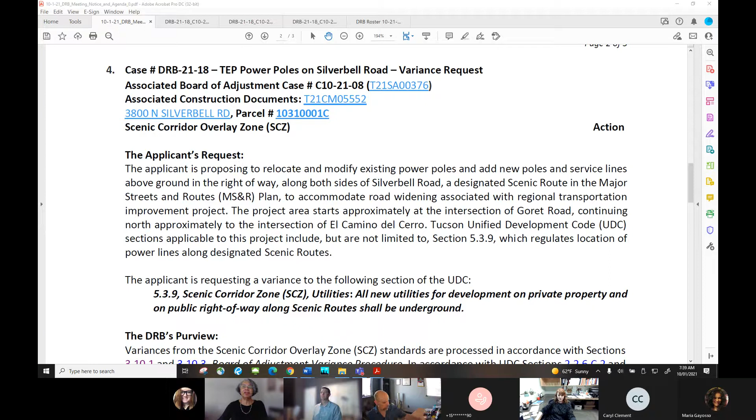The applicant is requesting a variance to UDC section 5.3.9, which regulates the location of utilities on designated scenic routes. Specifically, they're asking to allow relocation and modifications of power poles above ground on a scenic route, and the second request is to allow new power poles and service lines to be installed above ground on a scenic route. That is a general summary of the case.

The code section, UDC section 5.3.9.a, says all new utilities for development on private property and on public right-of-way along scenic routes shall be undergrounded. Specifically with the Board of Adjustment, variances can be requested when there are unique physical circumstances that prevent conformance with code requirements. That's my general presentation for this morning. I'm willing to answer any questions you might have.

Okay, thank you for that overview. So just to set the expectation for the board, is our purview to evaluate whether we would recommend a variance and then the variance board decides for sure? Or what is our exact purview?

We're just going to give our recommendation, either up or down, for this request of a variance, and then it's going to be forwarded to the Board of Adjustments for the final decision. And Russlyn, correct me if I'm wrong, I believe that the DRB can also make recommendations that would assist in mitigating any negative impacts that might occur. Yes, we can make recommendations to that effect.

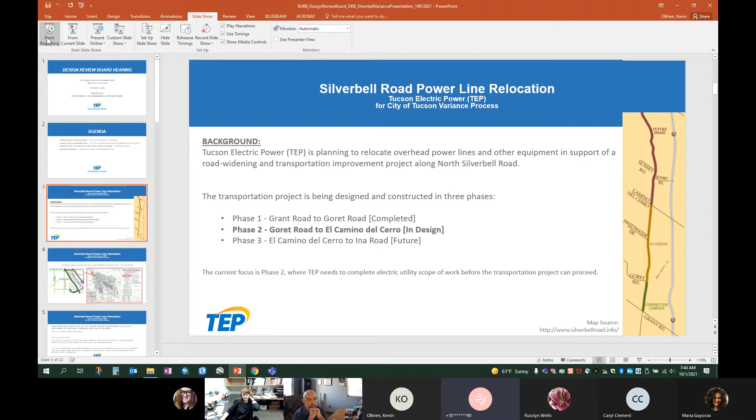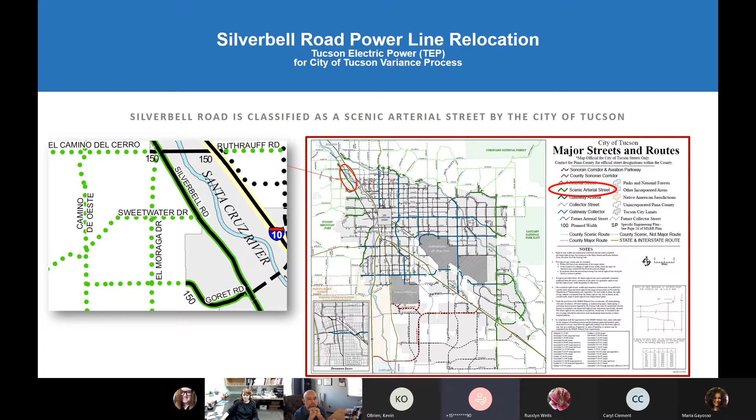Silverbell Road is classified as a scenic arterial street. I'll go ahead and run this that way—this will be better. As you can see here, from Goret Road to El Camino del Cerro, Silverbell Road is classified as a scenic arterial street per the City of Tucson Major Streets and Routes Plan. As such, it's subject to sections of the UDC.

Again, as Russlyn mentioned, section 5.3 pertains to the scenic corridor zone, and 5.3.9 pertains to utilities, where subsection A, I'll paraphrase, states that new utilities be undergrounded, and subsection B specifies that while upgrades and reinforcements are allowed, the total number of electrical circuits cannot be increased. So these are the two items that we're seeking a variance for, which I'll present more information on as follows.

As you'll see, the blue line represents the relocation section. So just north of Sweetwater Drive, the existing power line is planned to transition from the west side of Silverbell to the east side, and the new line will be constructed along the east side of Silverbell, where the existing line, represented by the green line, will be removed. Continuing south, again, the blue line represents the relocated section that will be a new power line, and then the green line along the west side of Silverbell will be removed.

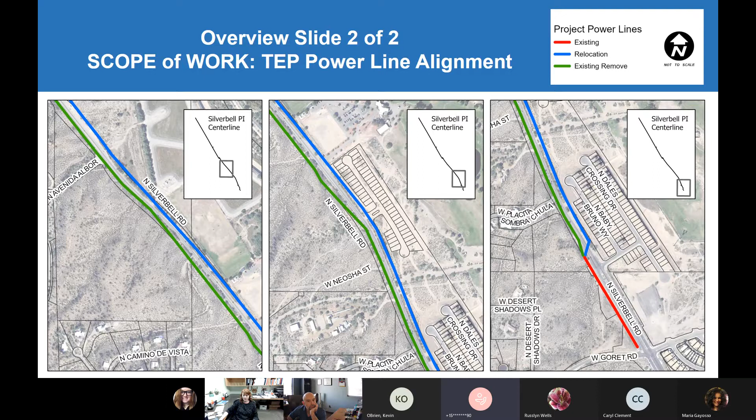Now, to help illustrate this, we've prepared several visual simulations. The image on the left provides a photograph of current conditions, while the image on the right shows a rendering of designed future conditions. These can be thought of as a before and after picture, left and right. The design simulation also includes the footprint of the transportation project, including roadway lanes and the new pedestrian bike path.

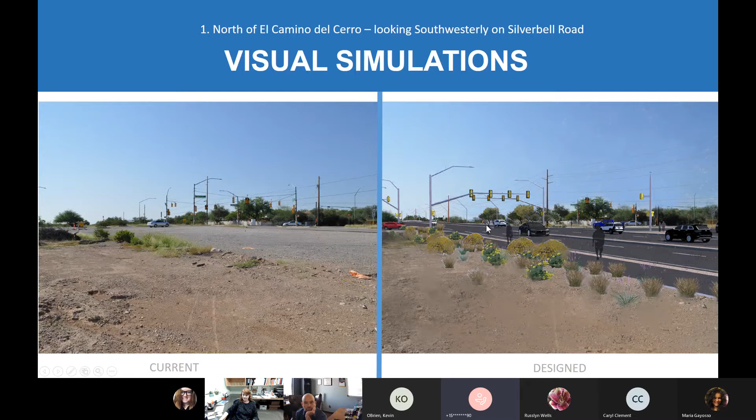This first simulation is located just north of El Camino del Cerro, looking southwesterly on Silverbell. This black car here in the foreground is heading north on Silverbell, while these cars on the right, a black car and a white car, are heading south. You'll see the existing utility along the west side of Silverbell, and in the design future condition it's similar, where this power line continues to stay on the west side, continuing south along Silverbell to a point just north of Sweetwater.

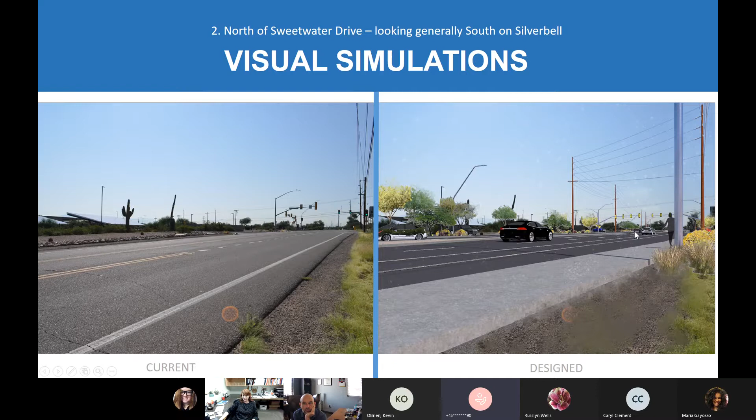This simulation shows the existing conditions where the power line is located on the west side, and the designed plan is to remove that section of power line and then relocate and rebuild a new section here on the east side, which will be located immediately adjacent to the pedestrian bike path. This will be opening up the west side of Silverbell and relocating the utility to the east side.

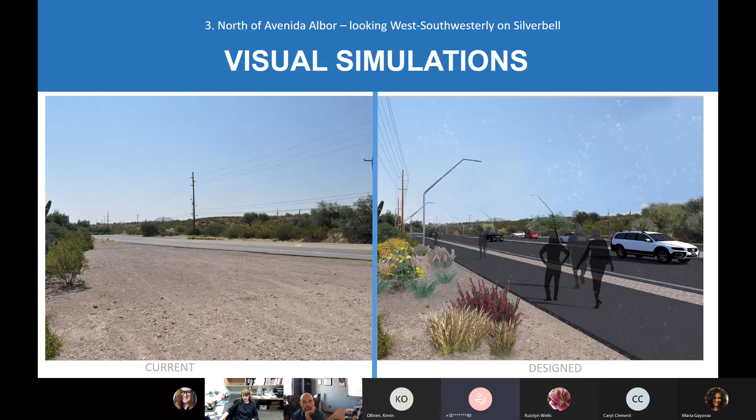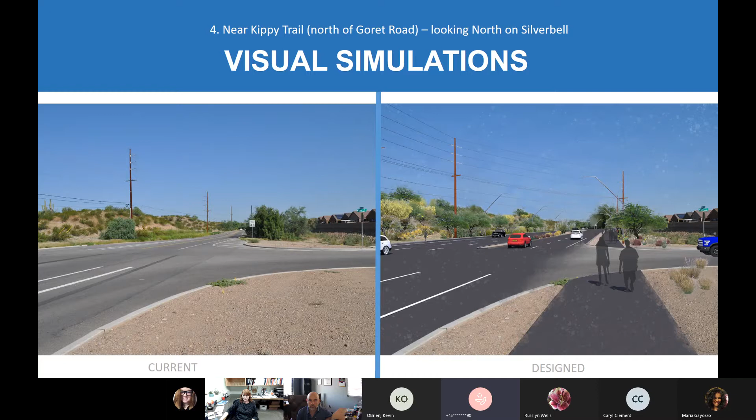So this realignment, this scope of work pertains to UDC section 5.3.9A, where we're relocating and keeping the line overhead as opposed to undergrounding. The second section here addresses 5.3.9B, where the number of circuits will technically increase.

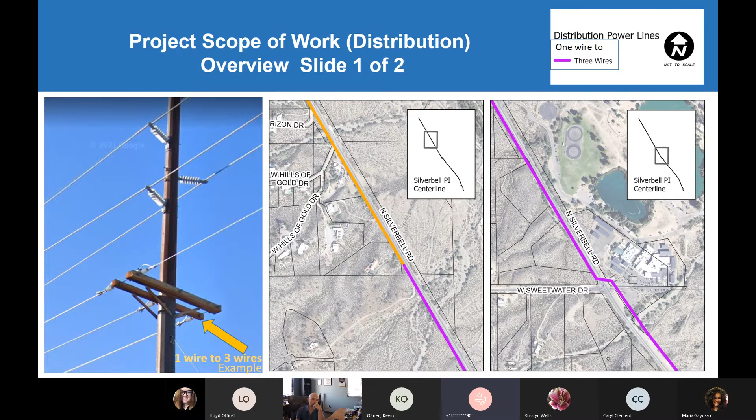The plan is to continue this 3-wire underbuilt configuration to a point north, as illustrated on these images. This image here in the middle is located south of Camino del Cerro, just north of Sweetwater, and the line will be coming south on Silverbell, represented by this orange line, and then it'll transition to that 3-phase or 3-wire distribution, continuing south as represented by this purple line. This will continue south along the new alignment, transition over with the same structures to the east side, continuing along the east side all the way to the point south, where it then transitions back and connects back to a point on the existing line.

As noted, the existing utility along Silverbell has 3 wires continuing to a point just north of Goret, just north of Placita Sombra Chula. So the plan again is to just continue that 3-wire configuration with this new configuration all the way north, thus increasing the number of wires from 1 to 3, and hence the variance for 5.3.9B.

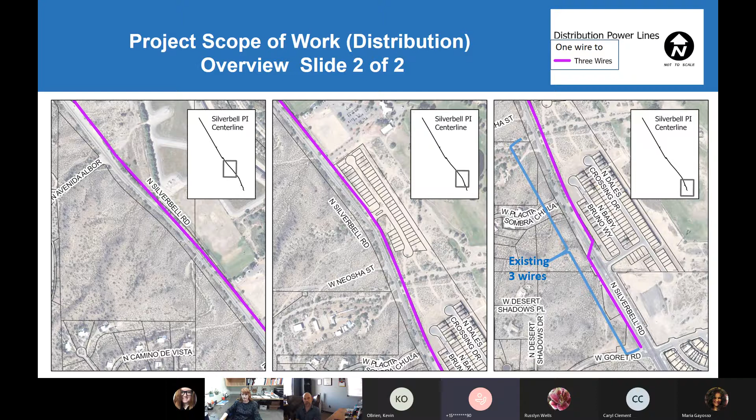There are several constraints to undergrounding electric utilities along Silverbell Road that really prevent and limit the feasibility of underground construction. Two of those items are the significant archaeological resources present, as well as floodplain activity in the Santa Cruz River and tributary washes.

So TEP and project stakeholders have been working together and designed the overhead utility along Silverbell Road to avoid unnecessary impacts to these valuable archaeological resources. Working closely with Pima County and other stakeholders, the plan has been to retain the line overhead as opposed to undergrounding. The other constraint, as mentioned, is the floodplain activity.

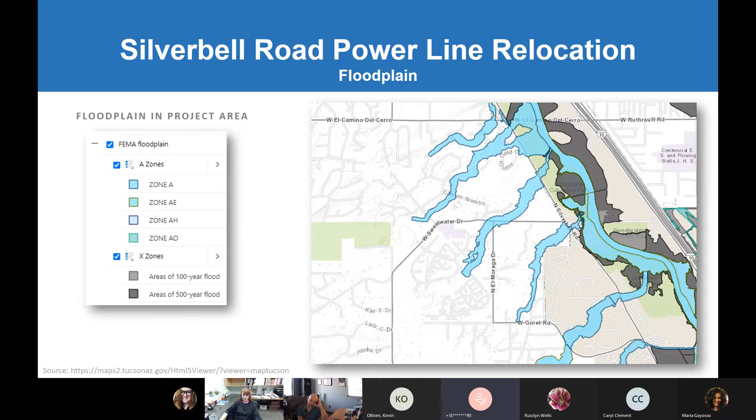So some items pertaining to the design elements and the existing conditions: the poles along Silverbell are a mix of different material types.

There's wood poles, steel poles, poles from different time periods, varying configurations of equipment, all as a function of the evolution and maintenance of this line over time. What we're proposing is a more consistent and uniform construction using a weathering steel pole structure.

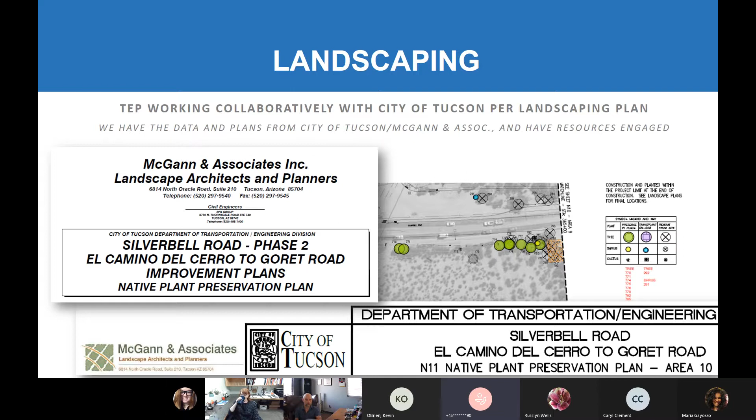In regards to landscaping, TEP has been working collaboratively with the city and stakeholders to integrate the utility design with the existing native plant preservation plan and landscaping plan for the project. This was prepared by McGann and Associates. We've been integrating our utility structures into this plan so the project as a whole will have a uniform and cohesive appearance, accented by landscaping to be implemented post-project after the transportation scope is completed.

In closing, we've been working closely with the city and other stakeholders for the success of this project. We've worked collaboratively to develop an integrated project plan, and this planned work will greatly improve the safety, functionality, and aesthetics of Silverbell overall.

This electric utility infrastructure is integrated with the transportation design. We're confident it will achieve a more cohesive, consistent, and ultimately modernized Silverbell Road corridor. For this, we appreciate your support.

It's been a pleasure working on this project with the city and stakeholders for quite some time, and I appreciate your time today and support of this project. So with that, I will transition back, stop sharing, and open it up for questions and discussions. Thank you again.

So that was an interesting presentation, DRB. I guess I'll open it up to comments. It looks like you already have your hand up. Rosemary, go ahead. Yes, I do.

A couple of questions. First of all, it looks like the new corridor is a great improvement—there's a pedestrian and bicycle path. What's being done to make sure that pathway is shaded with trees that don't conflict with TEP's power lines?

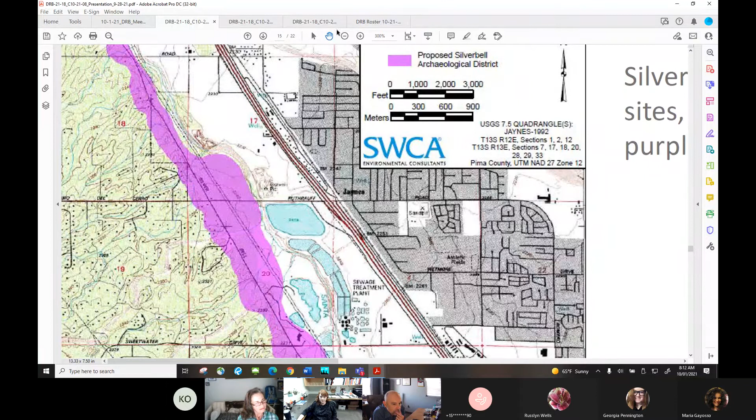Okay, so again, Silverbell Road is indicated, and it looks like the bulk of that activity is to the east of Silverbell on this map. Yeah, and that's the location where the line will be located, on the east side of Silverbell. It'll run from Sweetwater to Goret, to just a point just north of Goret. It'll be on the east side, and then it'll be running perpendicular to all of those tributary washes.

Okay, so I just want to say I agree with Nathan, we don't have all the information that we need. I think what we would need to know is: what is the depth at which the power lines would need to be buried if they were buried? How deep would the trench need to be? Could it be in a trench with the other utilities?

Yeah, all of these things are coming to that point. On the depth, it could range from 4 feet upwards of 12 feet. And there's no utilities trenching in along the same alignment that TEP needs to construct a power line. So there is no trench for co-location, which can be a really efficient means of locating utilities. But in this case, since we're relocating along the entire extent of the transportation project, there is no common trench. So we would need to construct new trench and new underground, at a depth of anywhere from 4 to 12 feet.

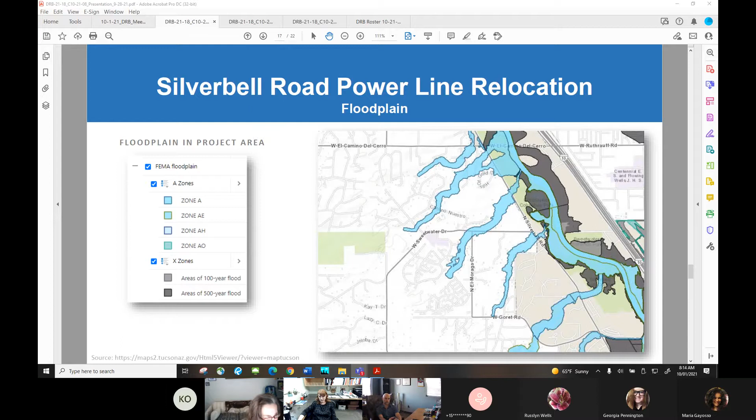Caryl, go ahead. Yes, could we go to a frame showing the proposed perspective looking north or south? I'm trying to figure out which side is the multi-use path on. Sidewalk runs along generally south, so that means it's on the east side. Am I understanding that correctly? Which side is the MUP on?

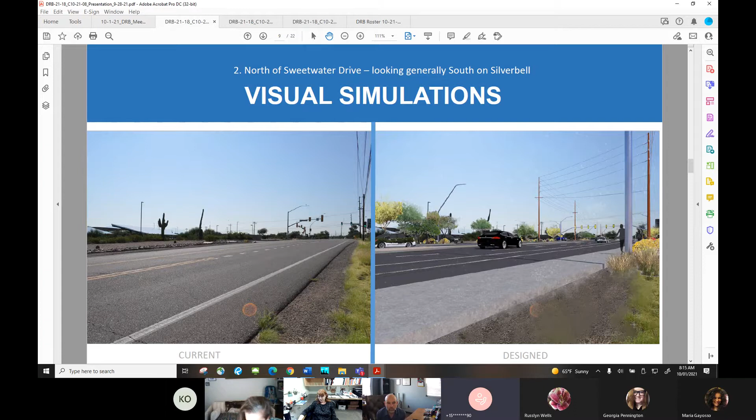Yeah, if you can advance to the next simulation, just the next slide. That path, that is on the east, on the east side of Silverbell. So that's looking... yeah, got you. Thank you.

Along with what Nathan and Rosemary are suggesting, why can't it be undergrounded underneath the MUP? I know the MUP isn't going down 4 feet for grading, but it's within the right of way. It's an area that's going to be disturbed anyway. So just a suggestion.

Okay. Yeah, and I think as you mentioned, that depth, it's just that path and the disturbance associated with it is not going to be at a depth similar to the utility depth.

Right. You know, I'm looking at this simulation, and that is a pretty stretch of road. When I drive that road going north, and I have that overview of the Catalinas to my right, to the east, it is very pretty.

And now what you're proposing here is we're going to have poles on both sides. No, in this case, we're removing the poles from the west side and relocating them on the east side. But what is in this simulation that I'm looking at right now? It's showing poles on both sides. Is that the crossing? Well, those are the two luminaires, light standards, like the street lights.

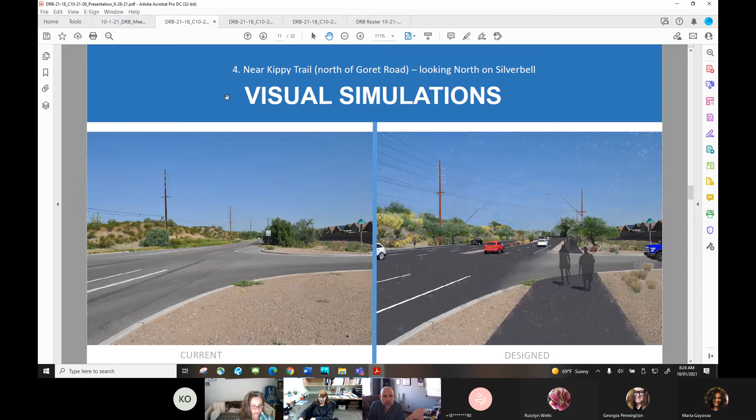Now we got to start thinking about how we're going to, what our motion is going to be. Right.

So our purview is like, do you recommend to the Board of Adjustment that this design go forward? If so, with what kind of mitigation factors? I'm just jotting down my thought, and I'll share that with the group. I think that we don't have enough evidence or data to convince the design review board that the overhead is justified. With the presentation materials that we just reviewed, we still believe that the underground is the best design. And maybe we list our questions.

But it's a pretty tall task for us to do in one meeting, cold turkey. A lot of people have probably put their best efforts into this design. I don't want to say they haven't. I know some very smart people have looked at it. And here we are on a Friday morning saying, is this good? Is it good? What else can we do?

I just think that if we want to be honest to ourselves as a design review board, we haven't been part of all that deliberation. We're looking at the cake after it's already been decorated and going, it's not really the best design from our purview. I know there's a lot of pressure from the community for TEP to put their lines underground, and there's a lot of pressure from TEP to keep them above grade. That's a built-in tension right there.

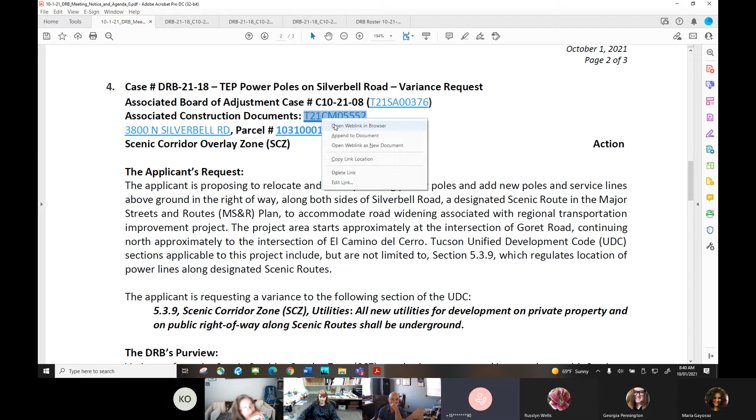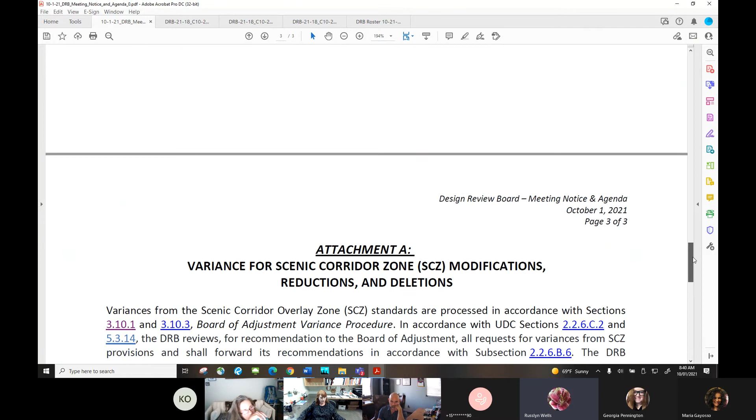Mr. Chair, members of the board, if I might, I'd like to read to you the specific findings for approval of a variance, which as the design review board, you should keep in mind as you are continuing to explore the design elements.

It says that the Board of Adjustment may approve a variance only if it finds, one, that because there are special circumstances applicable to the property, strict enforcement of the UDC will deprive the property of privileges enjoyed by other properties of the same classification in the same zoning district.

The second item is that there are special circumstances that were not self-imposed or created by the owner or one in possession of the property.

The next criteria is that the variance granted is subject to conditions that will assure that the adjustment authorized shall not constitute a grant of special privileges that would be inconsistent with limitations upon other properties in the vicinity and zone.

The next item is that because there are special circumstances applicable to the property, including its size, shape, topography, location, and surroundings, the property cannot reasonably be developed in conformity with the provisions of the UDC.

The fifth criteria is that the granting of the variance shall not be detrimental to public welfare or injurious to other property or improvements in the neighborhood.

The next item is that the proposed variance shall not impair an adequate supply of light and air to adjacent property, substantially increase congestion, or substantially diminish or impair property values within the neighborhood.

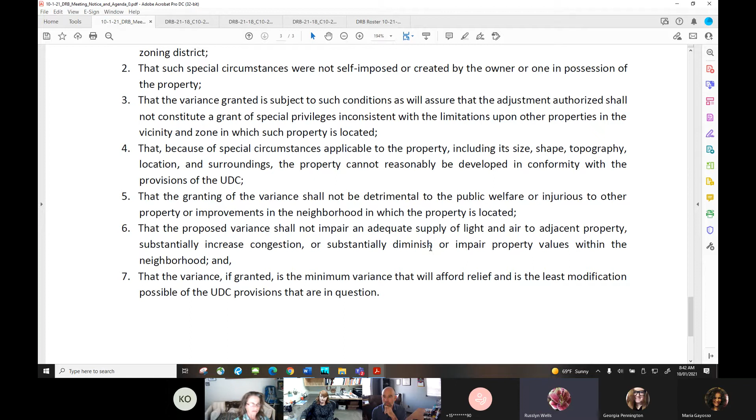Thank you for bringing that up. We were swirling around and around, and now we have some guidance here. So maybe we should look at these 7 points and see how we land on each one of them.

Number 1, special circumstances applicable to the property. Strict enforcement of the UDC will deprive such property of privileges enjoyed by the property. It can approve it because I don't think we're depriving any other property by going overhead. Set maybe views, but how do you determine that? Right now there's overhead power, and tomorrow there's overhead power. Right, you're right, okay. So let's go on.

Number 2, such special circumstances are not self-imposed. And if the circumstances are archaeology and floodplain, I would agree they're not self-imposed, not created by TEP or anyone in possession of the property.

Number 3, the variance granted is subject to such conditions as will assure that the adjustment authorized shall not constitute a grant of special privileges inconsistent with the limitations upon other properties. So is this a special privilege for power? So it seems that way. Who doesn't enjoy these special privileges? So the special privilege would be the granting of the variance, correct? I mean, allowing power poles, allowing an exception for power poles, right, it's a precedent that will be set if that happens.

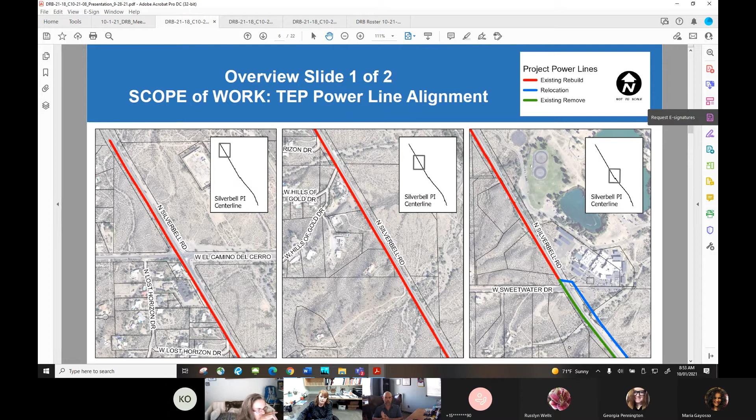Let's see, we're on number 6. This variance will not impair an adequate supply of light and air. I think that's fine. And it won't diminish property values. I couldn't say, but I don't think it would.

Number 7, the variance, if it's granted, is the absolute minimum that they would need to get the relief, and is the least modification possible of the UDC provision. Well, it's sort of an all or nothing, isn't it? Is there any portion of this that can be underground, Kevin? No, it's all in the same - I mean, it's the same condition throughout. It's that pink zone of archaeological resources.

Yeah, that proposed archaeological district along Silverbell is very consistent across, as that pink map illustrated. The density and continuity of the archaeological resources are significant throughout the entire length of the project area. Kevin, are you aware of other construction projects, utility projects that had a real negative experience in that zone?

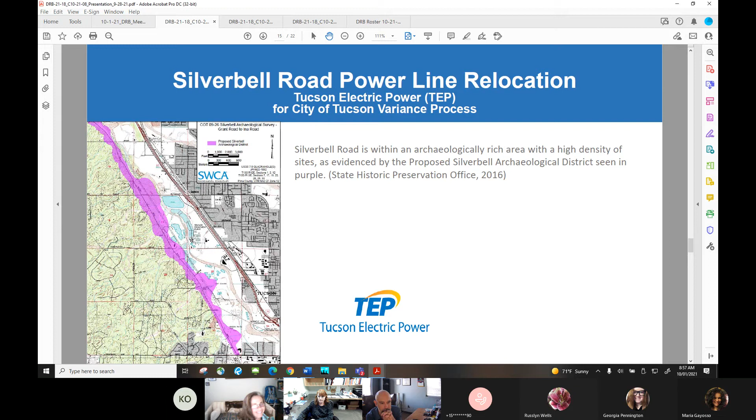Okay, could we go back to that list again? Thank you. Is there any in here of the 7 that we failed?

I kind of feel like number 3 is iffy for me. Like we've discussed, the other utilities are all buried, and without information about the depth at which the electrical line would need to be buried compared to the others, it's hard for me to say whether this applies or not.

What if we asked for them to come back with an overlay of, here's the power plan, here's the water and sewer plan, and whatever else, and we can see how they don't match up or whatever. Yeah, I'd like to see that. I'd like to see a section through the roadway and what the other utilities look like, and what it would look like if the electrical line were buried.

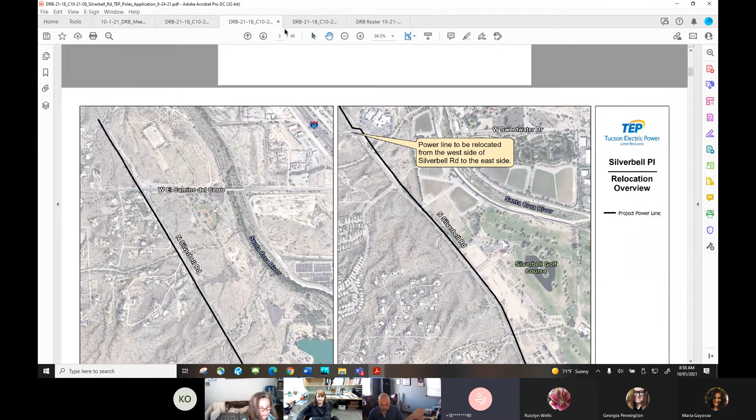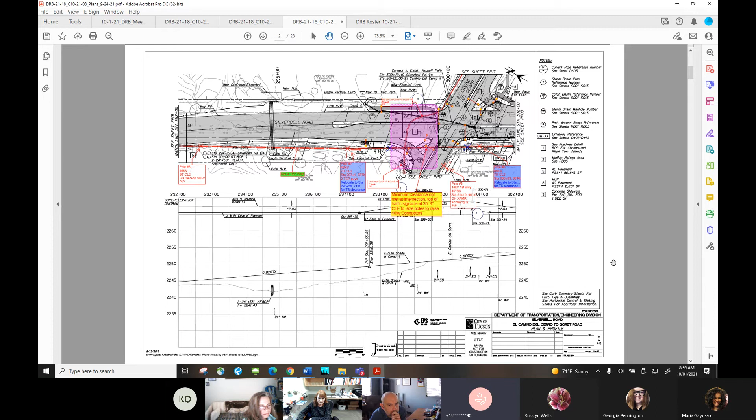Yeah, so to that end, the depth is anywhere from 4 to 12 feet, and there is a set of plans included with the submission, the City of Tucson plan set that includes all of the utilities in the area, in addition to the TEP infrastructure overlaid on the plans for the project. So this will provide an illustration of all of the alignments of different utilities, as well as TEP's alignment, where you'll see most of the utilities are going this way and that way, crossing at various intervals, or are in the roadway, where the unique nature of the electric utility is that it's going to parallel the right-of-way consistently for the length of the project.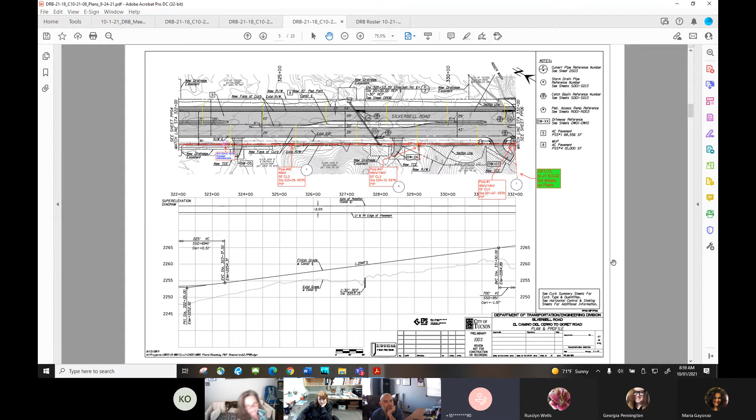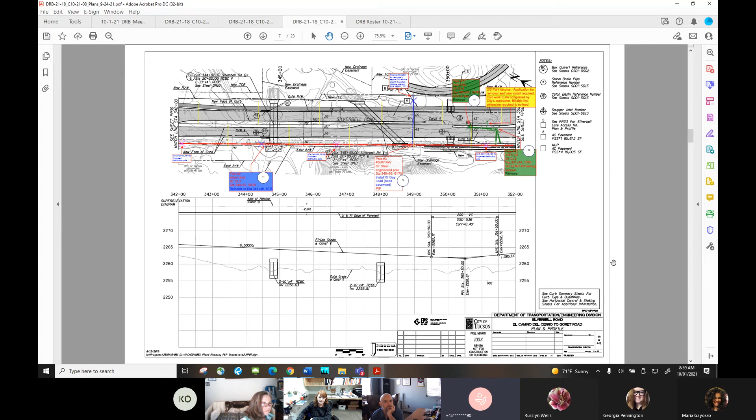So that's a little bit different than some that may be in Silverbell for a portion and then turn and go a different direction, or go west or east. And another note too is that that alignment for TEP's electric utility is an old alignment that predates the city's acquisition, or annexation, I suppose, of that area. And so we're trying to adjust and make it as compatible with the transportation infrastructure of the future.

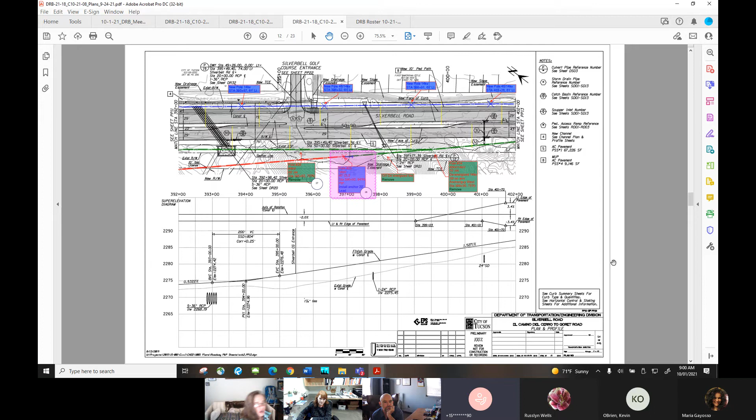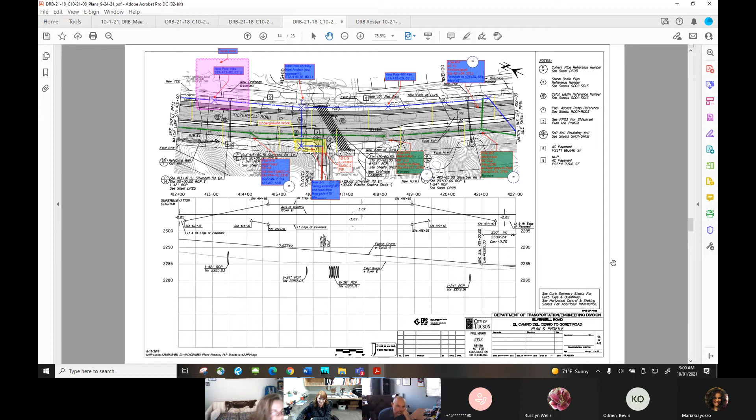And so the profile plans, I would take a lot of time to read. Might you have an elevation profile, an overlay in plan view of the utilities? The profiles take looking at station numbers and all that. Is there something that might be a little more efficient for us to review?

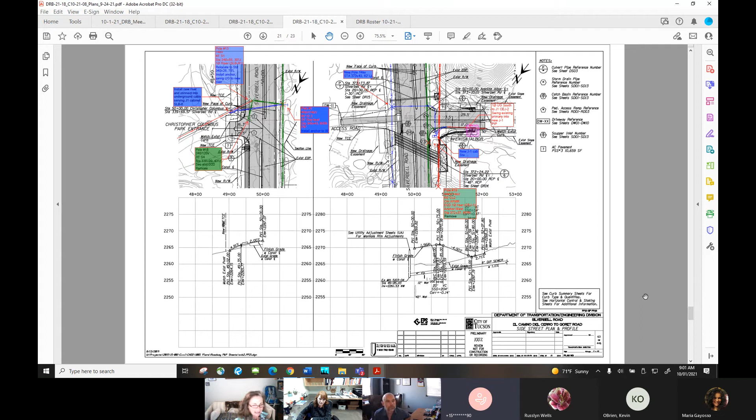Yeah, and right now we don't have all the other features for the utilities. This was prepared by the city with support from their engineers, and it includes a lot of utilities that we don't have the data for. But that's something we can possibly develop and work on. We can work with the city engineers to maybe create something to that effect. But I think the key point is that the alignment for our electric utility is quite different from the other utilities, so the opportunity to have a shared alignment really doesn't exist.

Here's something I want to point out. I would like to hear from the other utilities what their scope of work is. What if we find out their scope of work is we've got to trench along the right-of-way and put in a new sewer line? Then it's reasonable to expect that scope of work to happen for TEP as well. Or if the sewer goes, I'm all good, I don't have to do any trenching because I'm already there.

Well, okay. But I agree, Nathan. I'm getting more and more of a feeling that there hasn't been a studied approach to what coordination might be possible with this project with other utilities. I think everybody's gone off by themselves instead of coming together and coordinating, looking at possibilities.

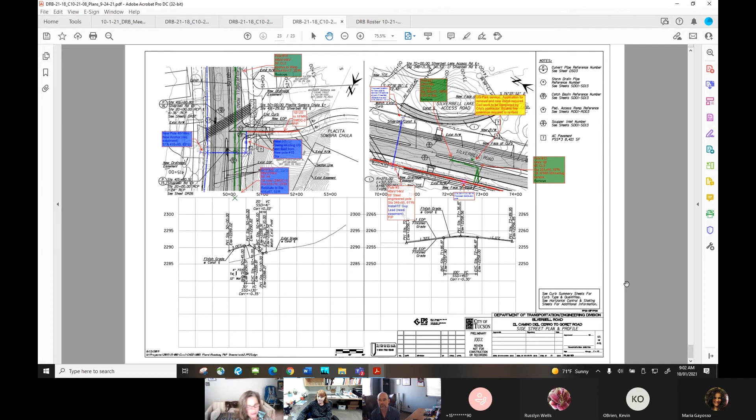So let's continue and say bring back wastewater and Tucson Water. What's their scope of work going to look like? Or do they not get the special privilege of going up in the air? Right. And also maybe just the general approach of further study needs to be done in terms of the possibilities, the potential of coordination, shared trenches with other utilities. I don't think that's been explored here by TEP.

Let's ask for a report on the other utilities then. Well, and Carol, and also the archaeological -- I think that's very important. Some kind of executive summary. Right. And to address Kevin's point, it's possible that the electrical may not be able to share a trench, but...

I think locating it buried under the MUP is a brilliant idea for a lot of reasons. If anything needs to be torn up, you're not tearing up the roadway, and it's just the pedestrian path that would temporarily suffer. So I feel like there's definitely some other options to look at. Yeah, I think the alternative, like under the MUP, that extent of disturbance is going to be much shallower.

And for coordination with other utilities, there's been weekly meetings and significant discussion regarding the alignment of other utilities. TEP has been adjusting our design to avoid other utilities like sewer. There's really no common shared alignment that would make for an underground pathway that all utilities could be co-located in. That just doesn't exist on Silverbell Road. So we've been meeting with other utilities and adjusting our locations so we're not in conflict with their facilities. The plan set shows the location of our structures in an effort to avoid conflicts with the city of Tucson transportation footprint, as well as the other utilities like sewer and fiber, etc.

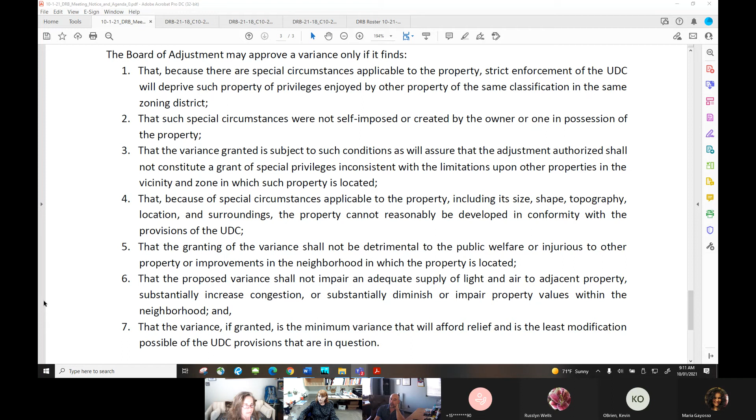All right, Carol or Rosemary, you want to take a shot at a motion? Did you write it down, Nathan? I didn't write it down. Can you hold up what you wrote down to the camera? Oh man, you're not going to be able to read this. Can't you make the motion? Can I make a motion, chair? Yes, Mr. Chair, members of the DRB, the chair is capable of doing the motion. Well, I think I'll take a stab at it then.

Thank you. The Design Review Board has reviewed the proposed scenic corridor zone modifications, reductions, and deletions, and recommends continuing this session, requesting the applicant bring back the landscape plan, the archaeological report with a summary, the flood control report with a summary, and some sort of exhibit showing what other utilities - for example wastewater, Tucson water, stormwater, gas - are doing in the same zone with the same constraints and challenges, so that we can evaluate if this variance request is a special privilege or not.

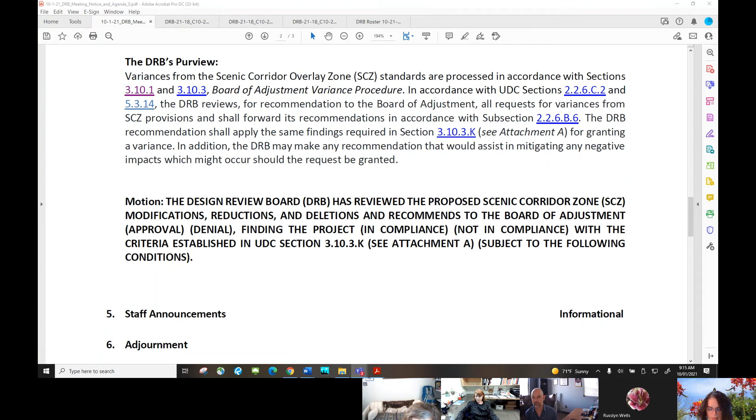Mr. Chair, I'm going to give you a heads up what's coming up. We have a solar carport being proposed on top of the parking garage of the Wells Fargo building in downtown. That needs DRB review, and also the conversion of an existing office space into a bar with facade modifications by the Chicago store building.

And also, I'm going to start putting together what we discussed at the last DRB meeting, Mr. Chair, a training session for the DRB regarding the recently adopted Sunshine Mile District. That meeting will include the current DRB members, but also the 3 design professionals that will be involved in reviewing cases in the Sunshine Mile, and as applicable, different neighborhood association representatives will be part of the DRB reviews as cases come in, as specified in the Sunshine Mile. So it'll be a bigger meeting.

At the last meeting, DRB members asked that it be scheduled during a scheduled DRB date, but also if we don't have other cases to review, so there's plenty of time for discussion.